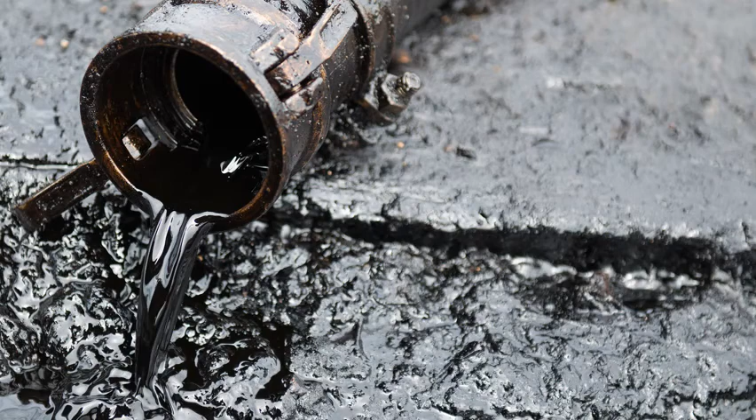This presentation is a training aid for the Spill Prevention Control and Countermeasures Plan, also known as the SPCC Plan. It was developed for Joint Base Charleston Weapons land-based facilities by the 628th Civil Engineering Squadron Environmental Element. A hard copy of the SPCC Plan can be obtained at the Civil Engineering Squadron Environmental Element in Building 721 at Joint Base Charleston Weapons. Instructions to obtain an electronic copy will be provided later in this presentation.

Your point of contact for this training, as well as any questions concerning the SPCC plan or requirements, is the Storage Tank Program Manager at the Environmental Flight, Ms. Mattia Wright. Her phone number is 843-963-4518, or you can email her at mattia.wright@us.af.mil.

The topics to be discussed during this presentation include: what is in the SPCC plan? Also discussed will be periodic inspections of oil storage tanks, as well as responding to spills.

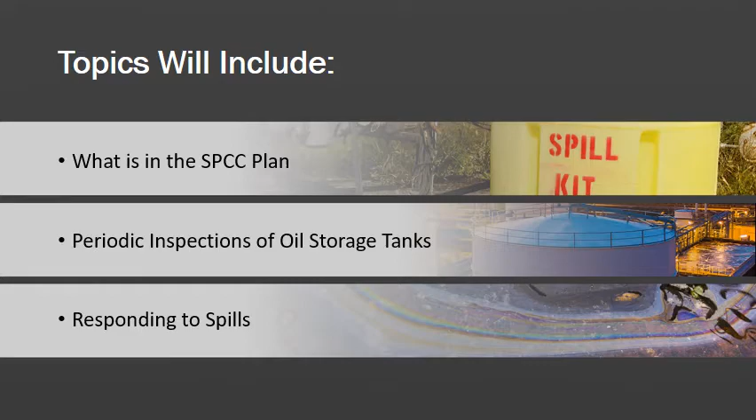So why should we worry about oil spills? Well, clearly in the past, we are familiar with the Exxon Valdez oil spill, or the oil spill in the Gulf of Mexico, and obviously these events had huge detrimental effects on the environment. But these products are used every day in our everyday life by everybody.

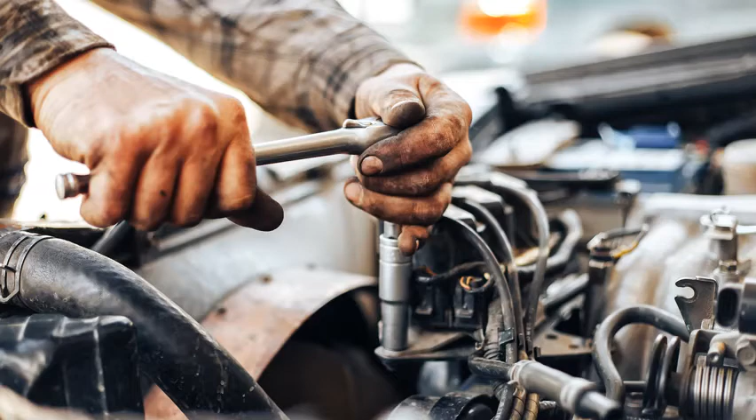It is the environmental engineer's job to find the controls and mechanisms to prevent the release of these chemicals while not interfering with their availability for everyday use, including the production of food and their uses in the actual food we eat. It is inherently obvious that we want to keep chemical hazards, along with their wastes, separated from the areas where we live. Even the chemicals used to produce the food that we eat need to be kept separate from the food itself.

When spills of chemicals or oil occur, there is a possibility of people being exposed to these materials by various methods. If any of these chemicals evaporate, for instance, they could become part of the air or smog and inhaled. It is also possible that the contaminants could work their way into drinking water sources, and people can be exposed by drinking polluted water. Also, if some surface waters are contaminated, and that water is used for irrigation, there could be direct contact and exposure to food, and eventually exposure to people through eating that contaminated food.

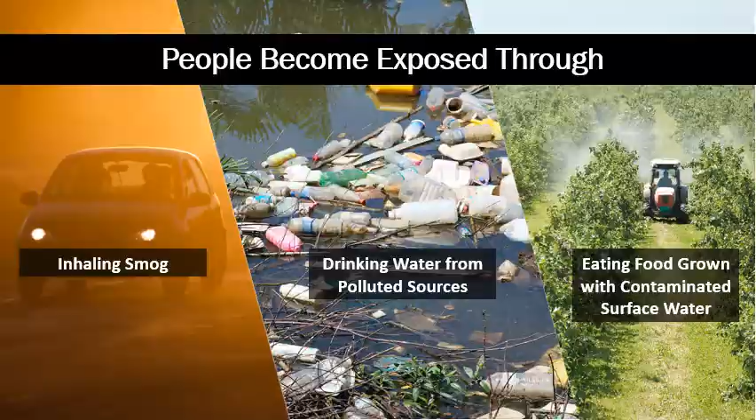Let's discuss from where the authority of the SPCC plan was originally derived. In 1972, Congress passed the Clean Water Act. Once passed, the Environmental Protection Agency, the EPA, was required to develop regulations to assist industries in complying with the new act. Some of the regulations developed required industries in certain facilities to develop plans to prevent the occurrence of spills and other hazards, namely SPCC plans. The Air Force, in turn, has developed instructions requiring installations to have individual SPCC plans that are at least consistent from installation to installation.

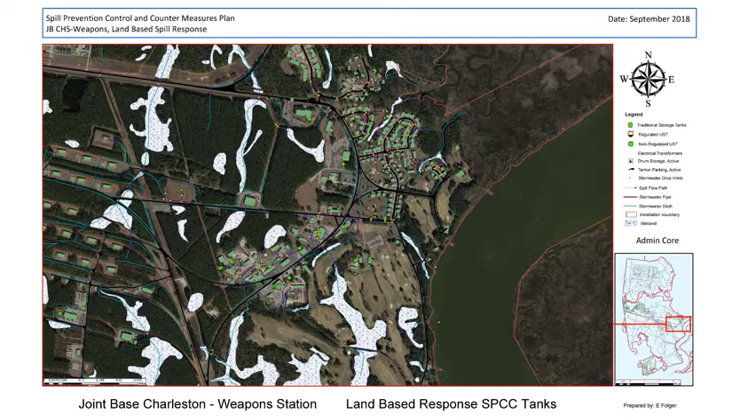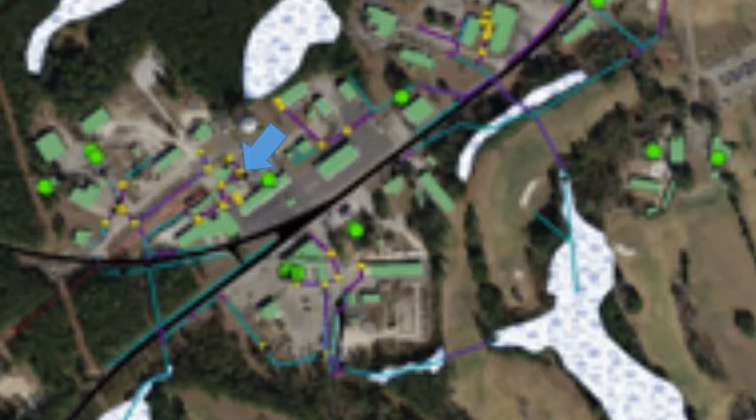Also included is a spill flow path from a given POL storage facility. This arrow coming from this particular storage tank behind Building 2 will show where a spill will flow towards which particular stormwater ditch or pipe, therefore predicting where the flow is going to go, which is the most vital information to glean from these maps.

Make sure a tank is not leaking when you fill it up. Duh! Someone has a painful grasp of the obvious. But this is why SPCC plans are written and standard operating procedures are developed.

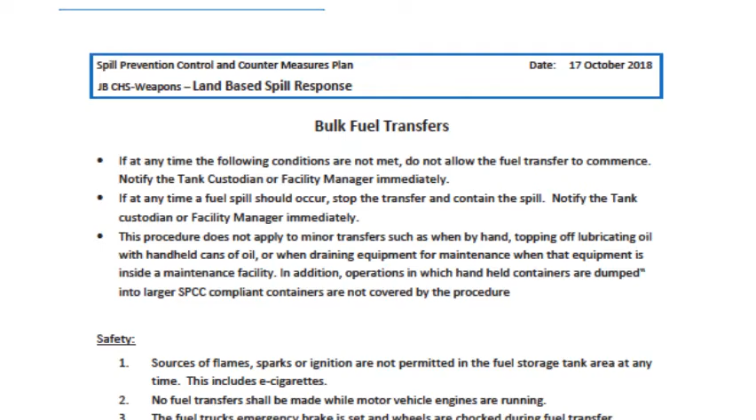In Appendix 6 of the SPCC plan, there is a checklist to be used when refueling tanks. At the top of the form, there are some conditions and safety items you should observe when refueling a tank. The middle of the form provides several steps in preventing spillage while refueling a tank.

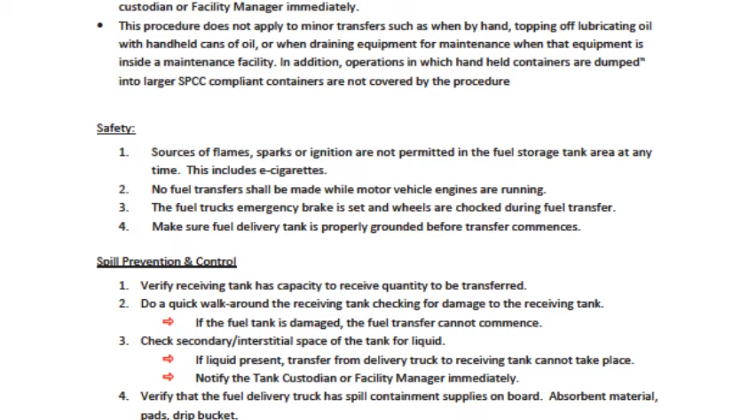For example, you should verify that the receiving tank has the capacity to receive the quantity you are trying to transfer. By checking gauges before transfer and during the transfer, you can ensure that spillage will not occur. As you approach the maximum quantity of the transfer, you should back off on the pumping speed to ensure no spillage occurs. You should do a quick walk around the tank and check for damage of any kind.

Be sure to check the berm and any other interstitial space for fuel. If there is already fuel in either of these areas, there is obviously an issue with the tank, and the refueling should not occur. Be sure that the truck has containment supplies on board, like absorbent materials or a drip bucket, etc., or that they are available at the facility itself. Be sure everyone involved in the transfer knows where the emergency cutoff switches are.

You should visually verify that all hose connections are not damaged and that the hoses are in good shape. You should remain with the fuel delivery truck for the entire transfer and hose breakdown. It is during the hose breakdown that most commonly spills will occur. You should verify the amount transferred from the receiving tank and make sure to lock all fill caps in place on both ends of the transfer.

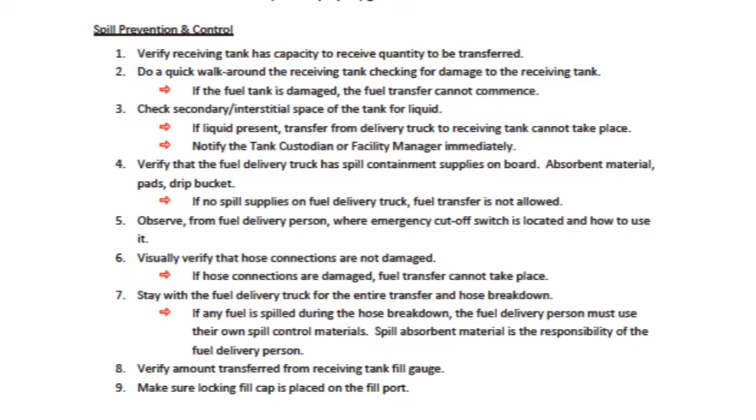Appendix 6 also provides a vehicle refueling procedure. This form provides both safety and spill prevention and control measures which should be followed during any vehicle refueling procedure. Sources of flames, sparks, or ignition are not permitted in the fuel storage tank area at any time. It should be noted that this also includes e-cigarettes.

You should be attentive during the refueling process. Do not sit in the vehicle waiting for the refueling to finish. And do not be distracted by a cell phone or any other electronic device. You should touch the vehicle prior to inserting the fill nozzle and prior to removing the fill nozzle. This lowers the risk of a fire starting from a static electricity discharge. No fuel transfers shall be made while motor vehicle engines are running.

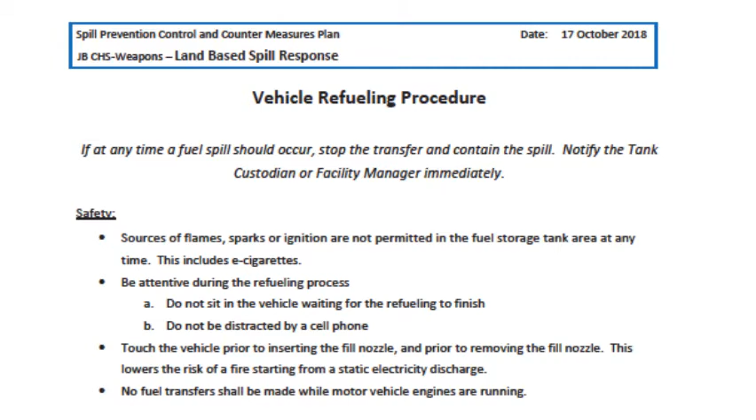To help prevent spills, you should follow normal operating procedures for starting up the pump and opening valves on the tank. Keep the nozzle pointed upward until placing it into the vehicle's tank fill tube. When you are finished refueling, replace the nozzle into its cradle, shut off the system, lock up, and complete any documentation you need to.

Remember, you should never try to top off the gas tank by continuing to squeeze the nozzle after it automatically clicks off the first time. This behavior is the leading cause of spillage from overfilling vehicle gas tanks. You should notify the facility manager if any fuel has spilled during the process. A couple of drops may be reasonably acceptable, and sometimes it's impossible to avoid. However, anything more than a few drops must be reported to the facility manager.

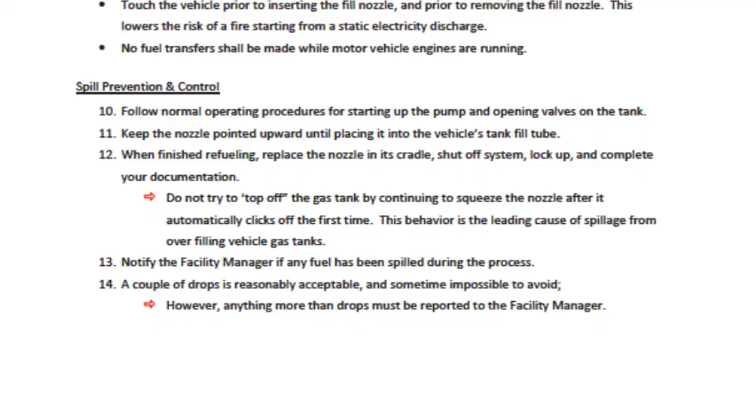Static electricity is a charge that is at rest or not moving. However, if a conductive path is provided for the static electricity, a static discharge or spark can occur. For example, a person walking across a carpeted floor reaches for the doorknob, the conductive path, and zap! They receive a static shock. This happens because static electricity is generated when the person walked across the carpet.

The same scenario can also occur when you are pumping gas, whereby the spark could ignite gasoline vapors and may cause a fire or an explosion at the pump. Due to the importance when you are refueling vehicles at Joint Base Charleston Weapons or your own personal vehicles, we want to reinforce these important safety tips outlined below.

Always turn your vehicle engine off when refueling. Do not re-enter the vehicle while refueling because this can recharge your body with static electricity. If you must re-enter the vehicle, discharge the static electricity buildup by touching the outside metal portion of the vehicle away from the fuel tank.

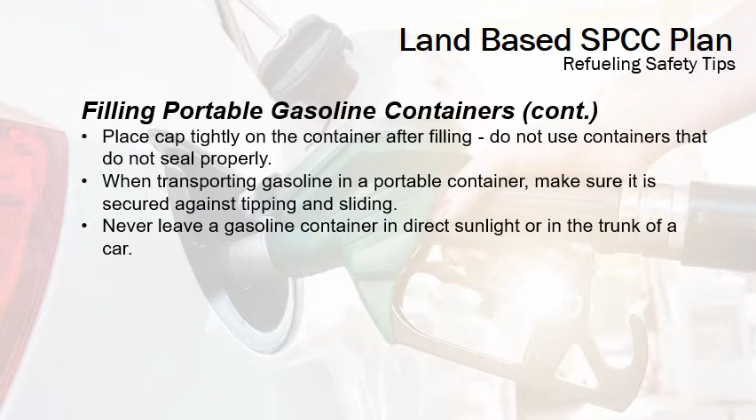When transporting gasoline in a portable container, make sure it is secured against tipping and sliding. Never leave a gasoline container in direct sunlight or in the trunk of a car. Should a fire occur during refueling, you should leave the nozzle in the vehicle and back away from the vehicle. Use the emergency shutoff button to shut off the pump and notify the station attendant.

Now let's discuss monthly tank inspections. The AFI requires monthly tank inspections. Primarily, these inspections are performed by the owner or operator of the tank. That means if you have a tank at your facility, you are responsible for its monthly inspection. Tanks attached to generators are primarily inspected by PowerPro. There are also annual tank inspection requirements, but those more in-depth inspections are performed by the CE environmental element.

In Appendix 8 of the SPCC plan, you will find an example of a monthly tank inspection checklist, as seen here. This form is for a specific tank found in the STARS database. You can print out the checklist for the particular tank you are inspecting, go into the field to perform your inspections, answer the applicable questions on the checklist, and upon return to the office, you can upload it to the electronic version of the STARS database. We will discuss that option later in this presentation.

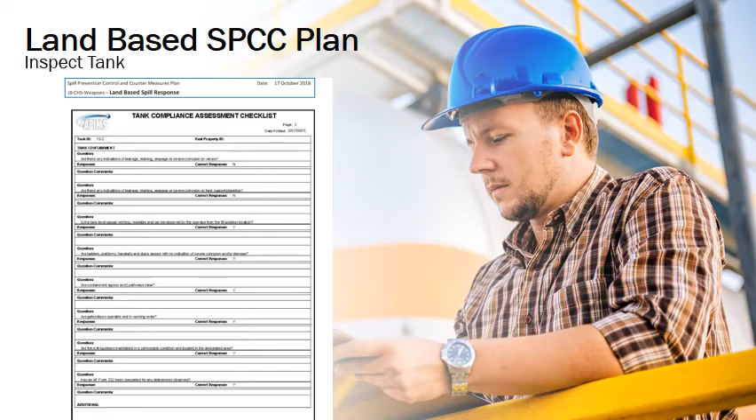Your first concern when you go out to inspect the tank is the inspection of the tank itself. There are various kinds of tanks at Joint Base Charleston Weapons, which we will discuss later. For instance, single-walled tanks versus double-walled tanks. For this discussion, however, we are talking about what you would naturally perceive as the tank, which would be both tanks of a double-walled tank or obviously a single-walled tank. You should carefully inspect the tank and its support structures and answer the questions that are applicable on the checklist.

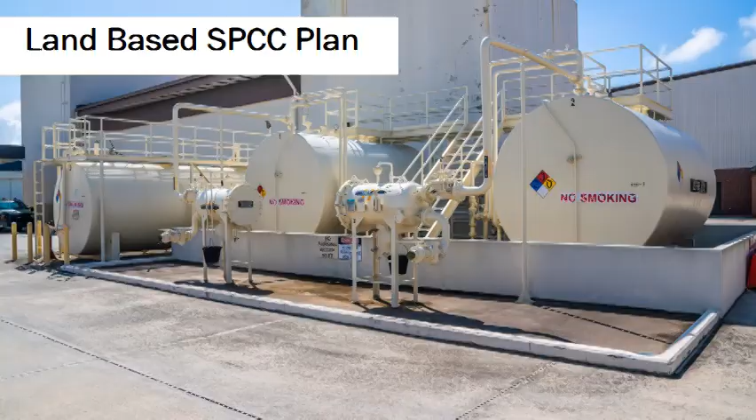This picture shows examples of a double-walled tank as well as single-walled tanks. The tank on the far left is a double-walled tank. There is one tank inside the actual outside tank that you see. This outside tank performs as a form of secondary containment. The two tanks on the right are single-wall tanks, and they require a concrete berm to act as secondary containment should there be a leak.

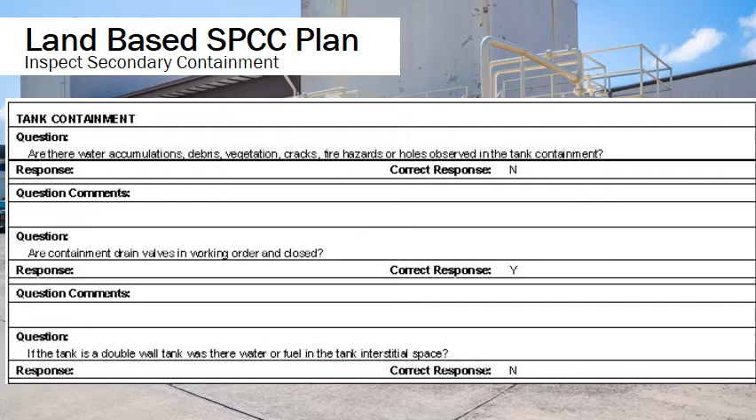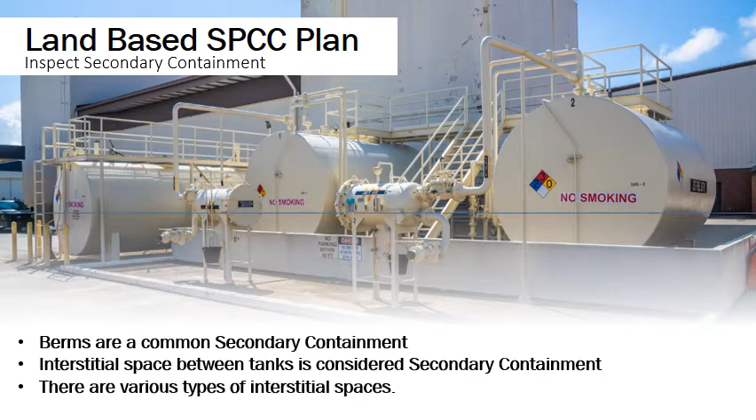Other questions on the checklist deal with secondary containment. These questions primarily deal with berms around single-walled tanks. We will further discuss later interstitial spaces, which are found in double-walled tanks. Berms are a common secondary containment option. The interstitial space of a double-walled tank is also considered secondary containment. There are varying types of interstitial spaces and different types of tanks, which we will discuss now.

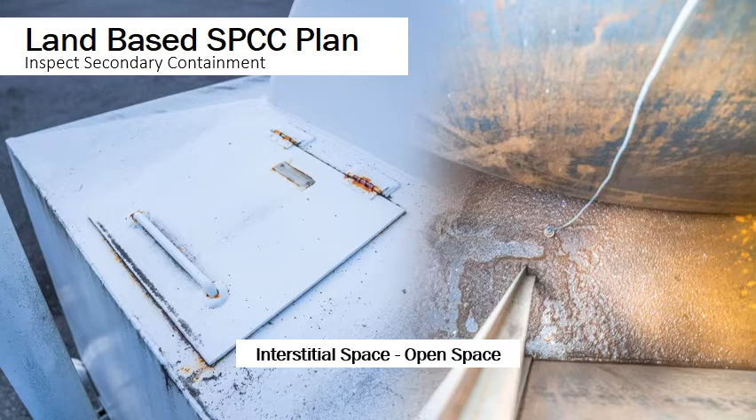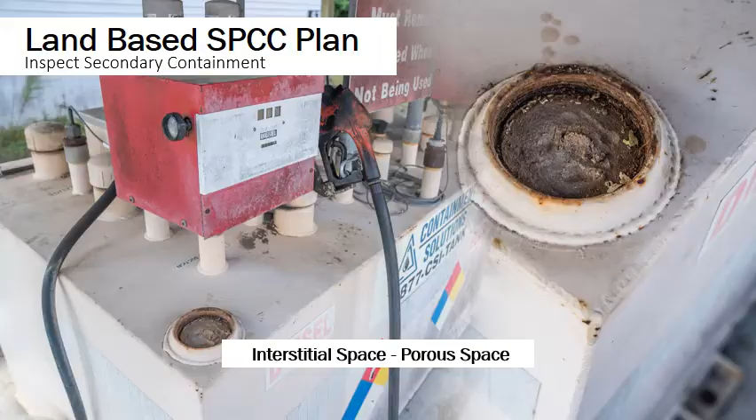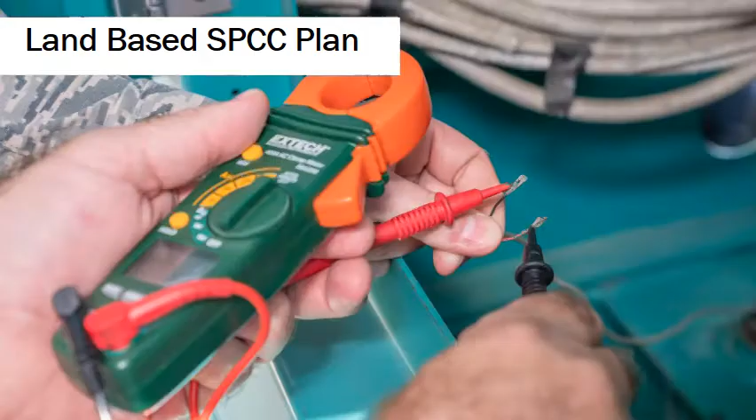Some interstitial spaces are sealed, as are many double-walled tanks, and use sensors to detect any leaks, as is also the case for porous space interstitial spaces mentioned earlier. It is important to note that the sensors used need to be routinely checked to ensure that they are in proper operating condition. This is an example of a semi-double-walled interstitial space.

The inspection checklist for the tank you are inspecting will contain questions concerning piping. The tank that you are inspecting may or may not have piping coming out of the tank. Certainly not the large piping as is pictured in this example here. Often there are small pipes or tubing coming out of the tank going to the piece of equipment the tank services. Also, there may be a hose coming from a pump to fuel a vehicle, but this is actually not part of the tank and will be discussed in the next section. You should answer all applicable questions concerning piping on your checklist.

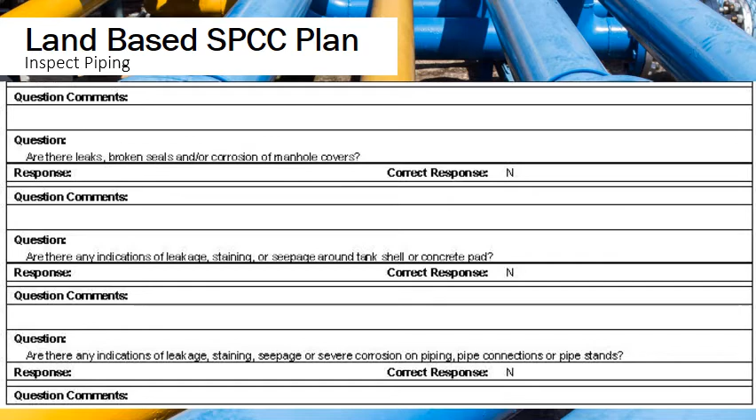There may also be questions on your checklist concerning pumps or other equipment. The tank you are inspecting may or may not have pumps attached to it, or they might be internal to the tank itself. You should follow the questions on the checklist and add any additional notations that are necessary for hosing or other pieces of equipment that may be part of the tank you are inspecting. Answer all the necessary questions on the checklist.

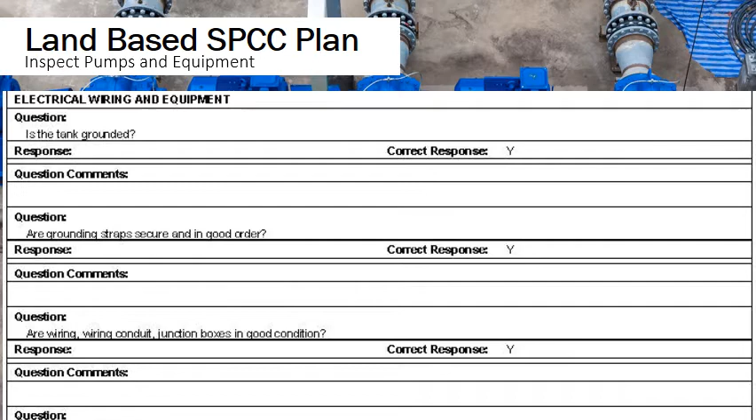Lastly, you will find questions on your checklist concerning the general conditions around the tank. So take a good look around the area of the tank and be sure to look for a spill kit. Make sure to open it and be sure that there are an adequate amount of supplies inside and that they are proper supplies for the material that is inside the tank you are inspecting. You should inspect all other ancillary equipment like fire extinguishers, as well as any gates or doors that are in the access ways to the tank itself.

There is also an electronic version of this checklist that is available online through the internet. If you are interested in using the electronic version of this checklist, please contact the Tank Program Manager at the Environmental Element, Mr. Earl Folger. He will need to grant you access and provide the necessary training for you to properly input information into the database.

The Storage Tank Accounting and Reporting, or STAR module of the APIMS database, is required by Air Force Instructions 32-7044 for all storage tanks. Access to this database requires a CAC-enabled computer and proper permissions be granted to each individual user.

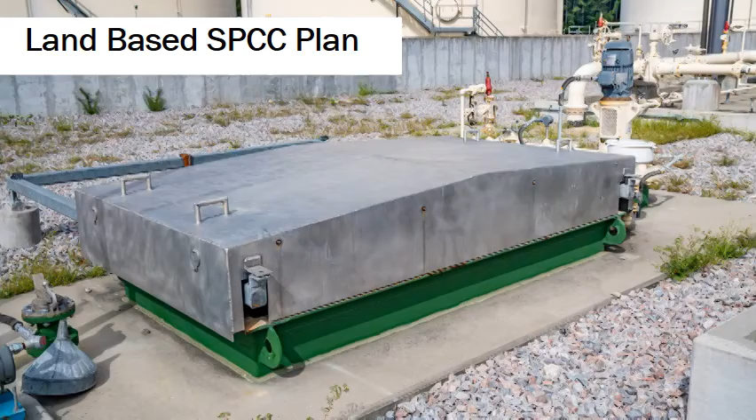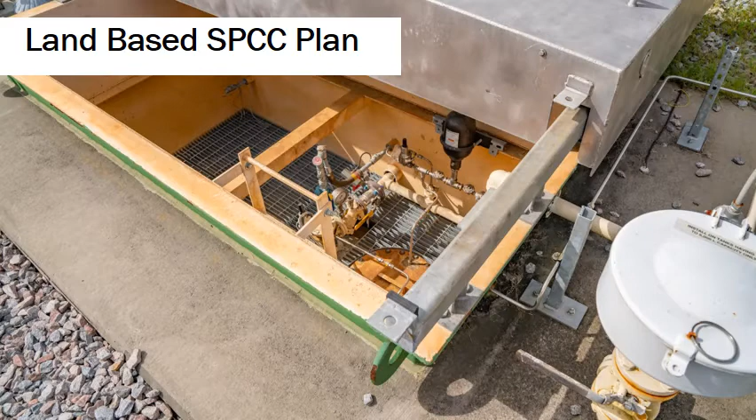The following slides will be a discussion about various types of tanks and berms, providing different examples at Joint Base Charleston. The first of which is a vault tank, which is seen here in the closed position. In many cases, piping for fuel transfers are actually left fully charged or full of fuel when not in use. So when the time comes for maintenance on the line, then often the fuel is pumped or drained to this vault tank so it can be recovered.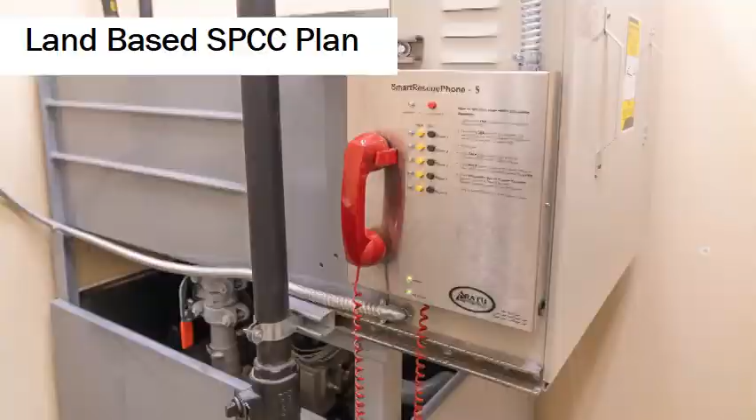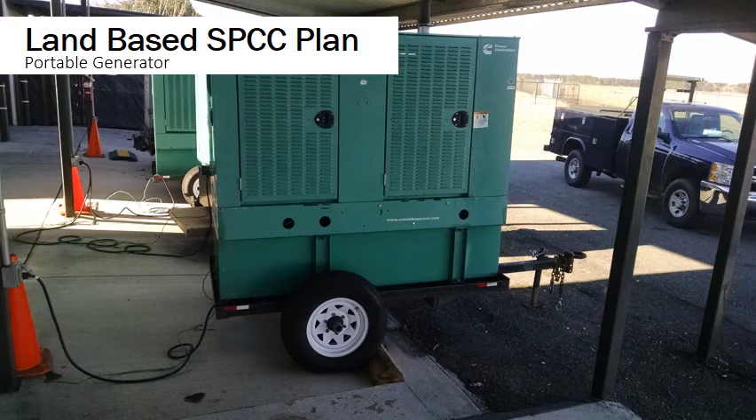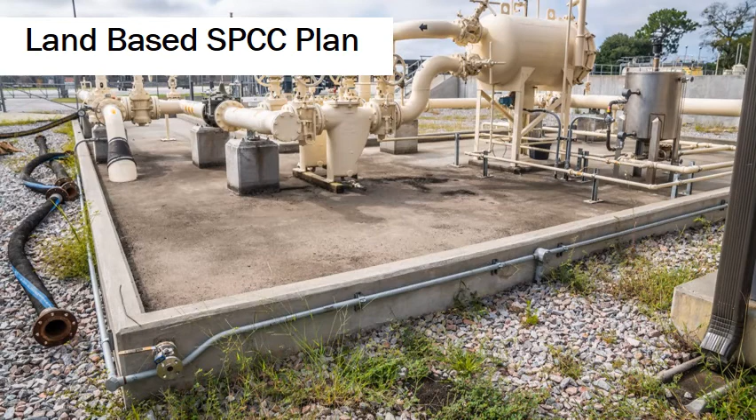This is an example of a portable generator with a belly tank. Whenever this equipment is not in use, it should be stored in an area that provides secondary containment. Berms come in various shapes and sizes. They are designed to hold a certain portion of the fuel in the tanks or piping that they contain. Note the valve in the lower left corner, which is currently locked. This is the valve that is used to drain the berm of rainwater using very particular procedures which will be discussed later.

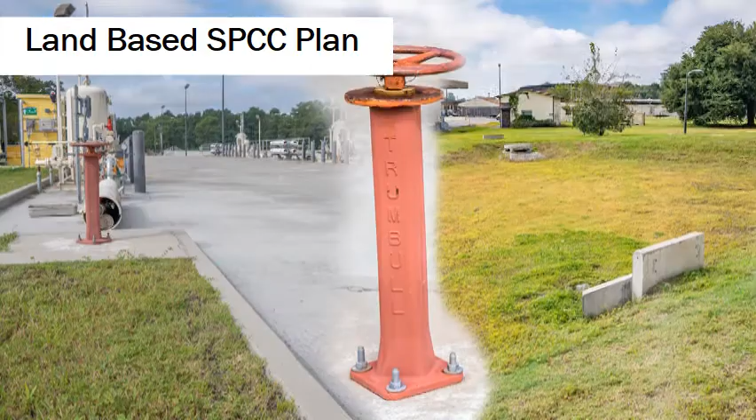We use the berm in this slide as an example of how a large area can be supported by a particular berm. The whole area on the left is the berm itself. There is what you would think was a storm drain in the middle. The valve highlighted in the middle of this slide, which can originally be seen towards the left, operates the valve that would release the rainwater from the berm after it fills up. On the right, you see the area in this particular situation where that storm water would drain to. Of course, this happens only if there is no fuel present, following particular procedures which will be discussed later.

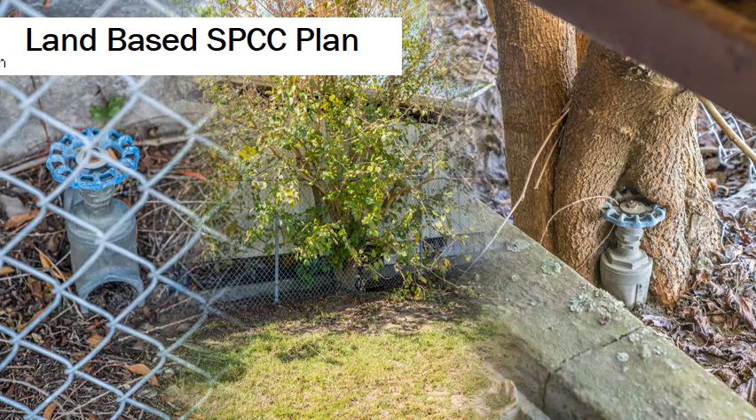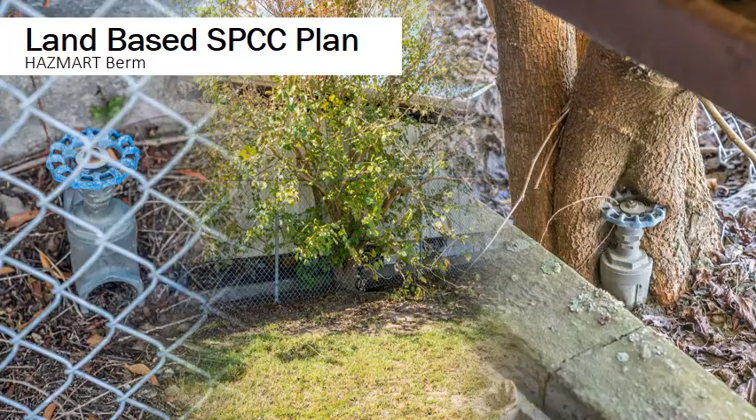All berms should have non-automatic open and close valves. These valves are to remain closed and locked until such time as rainwater needs to be drained. A trained person knowledgeable in detecting sheens has to visually inspect and determine if a berm can be drained to the ground.

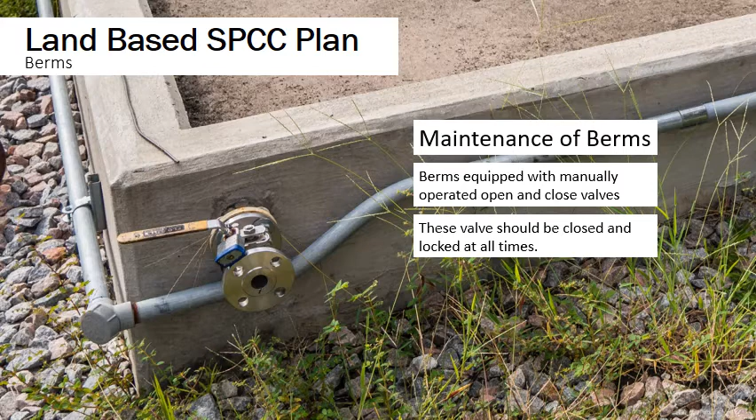The following procedures should be used in the process of draining a berm. First, inspect the rainwater for a visible sheen. For a minimal sheen, you can use absorbent pads to remove any product. When no sheen is present, unlock and open the valve to drain the berm. After the berm is empty, close the valve and lock it. Lastly, be sure to complete the secondary containment drainage log.

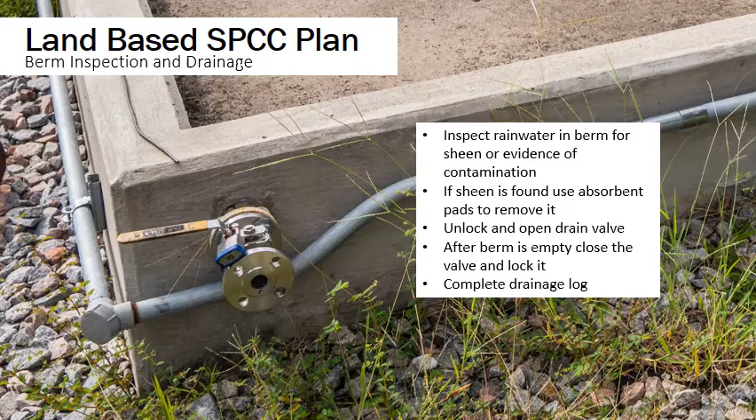It should be noted that if the sheen is excessive or there is actually a layer of product in the berm, you should contact the environmental element for assistance in investigating the possible source. A secondary containment drainage log must be kept for all berms. This drainage log can be found in Appendix 8 of the SPCC plan.

Portable tanks, when not in use, should be stored in areas with secondary containment. It should be noted, however, that if the portable tank is empty, it does not need to be stored in a containment area. Some portable tanks actually are double-walled and have an interstitial space and therefore a self-contained secondary containment. Tanks like this do not have to be stored in containment berms. All portable tanks should be operated in accordance with their individual technical manual or manufacturer's specifications. Specific SOPs should be followed for the filling and transfers of fuel or oil to and from any portable tank.

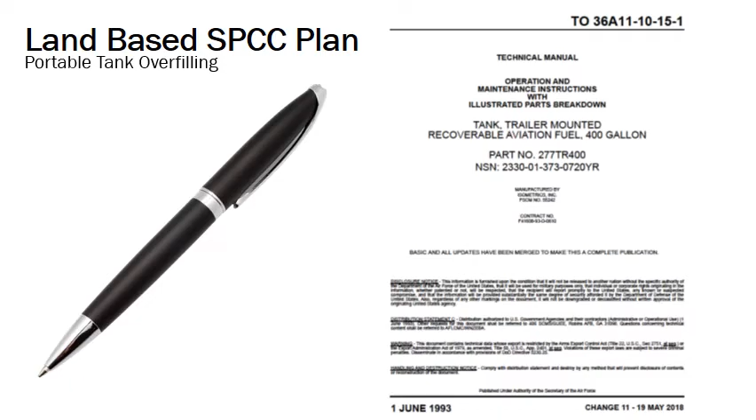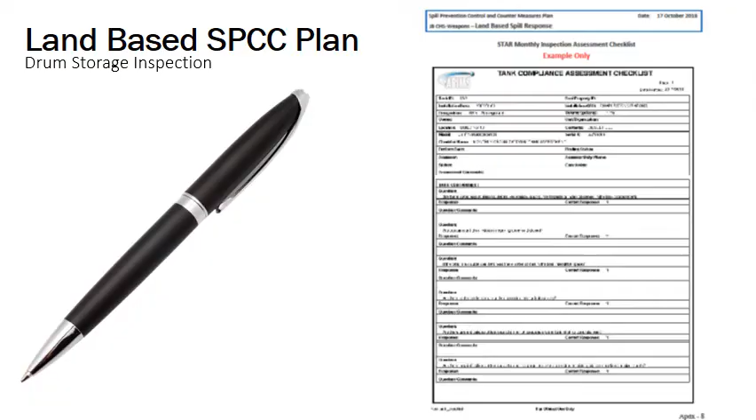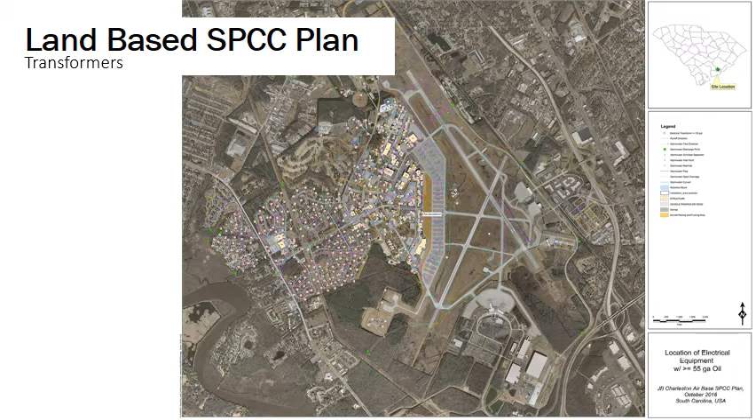A map is provided in the SPCC plan showing where all the electrical transformers containing in excess of 55 gallons are located. There are hundreds throughout every area of the weapons station.

Weapons station electrical shop personnel are charged with doing the periodic inspections on all transformers. The checklist shown here is found in Appendix 8 of the SPCC plan and should be used for that inspection unless another form is approved by the environmental element.

Anyone on base, however, who observes that there is an issue, perhaps a leak or a spill from a transformer, should report it immediately to the environmental element personnel and the electrical shop.

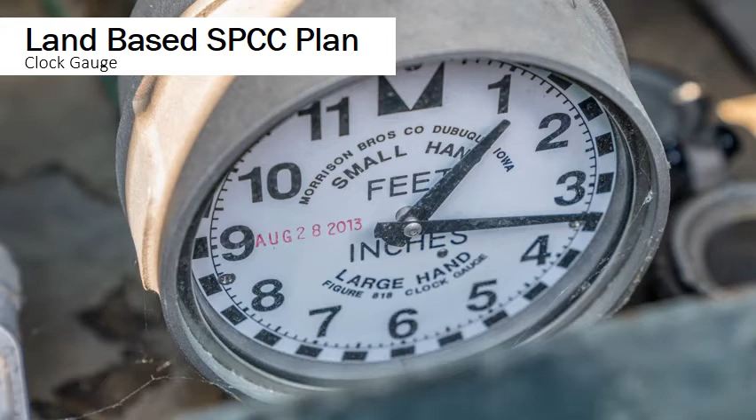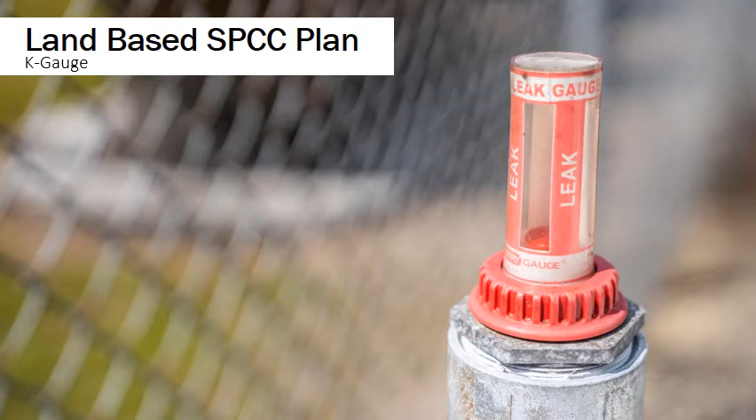On a double-walled tank, the space between the two tanks is called the interstice, or the interstitial space, which is synonymous with secondary containment, of course. In this picture, you will see a K gauge, which is actually installed in the interstitial space of a tank to determine whether or not there is a liquid in that interstitial space.

If the gauge indicates that there is liquid in the interstitial space, then there's an excellent chance that you have a leak in your inner tank. The particular gauge in this photo is indicating that there is not presently a leak occurring in the interstitial space. If there were a leak in the interstitial space, the small red disc that you see at the bottom of the gauge would begin to float up in the lens that you would see.

One word of caution. Sometimes gauges of this type will become inoperable due to corrosion or buildup of materials around the disc inside the gauge itself. The only way to check on this is to unscrew the gauge, which you should be able to do by hand, and make sure that the disc indeed is free to move and is not corroded. There have been instances where the gauge indicated that there was not material in the interstitial space, but because of this corrosion, the disc did not rise up as expected and the leak went undetected.

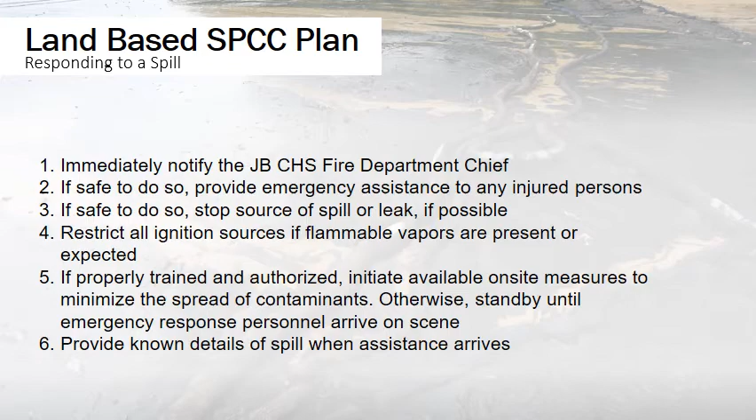As you are cleaning up the spill, remember that all materials used will need to be containerized in a drum or other proper container and prepared for proper disposal. This material may include the absorbent material spread to soak up the liquid, for instance, the kitty litter or clay material, any absorbent pads or socks that were used, and any personal protective equipment that was worn during the cleanup.

One should keep in mind that very often this waste is disposed of at a cost per pound. You certainly should use enough material to get the job done, but keep in mind any excessive material contaminated will increase the cost of disposal. However, it is more important to get the job done.

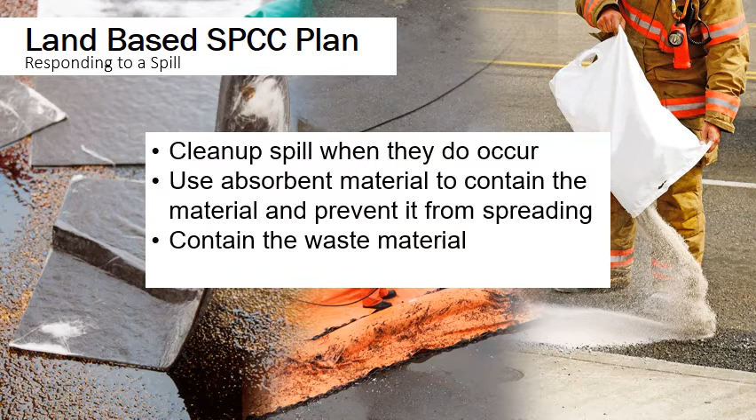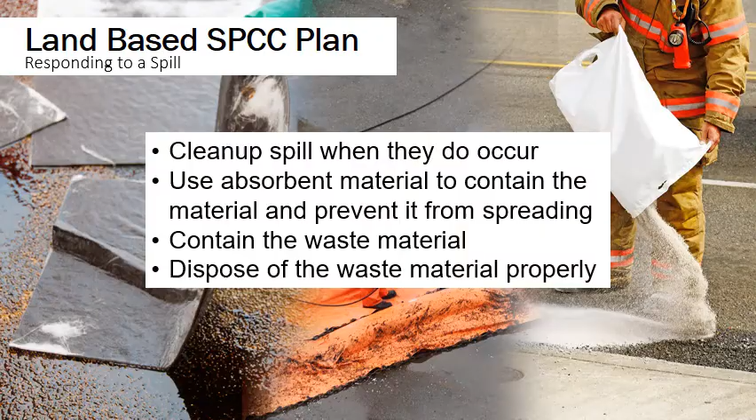Arrangements will need to be made to have any contaminated materials properly disposed of. Depending on what was spilled and the methods and quantities of materials used during the cleanup, disposal methods can vary. Now let's discuss how to dispose of materials properly. There are varying methods of disposal depending on the type of materials themselves.

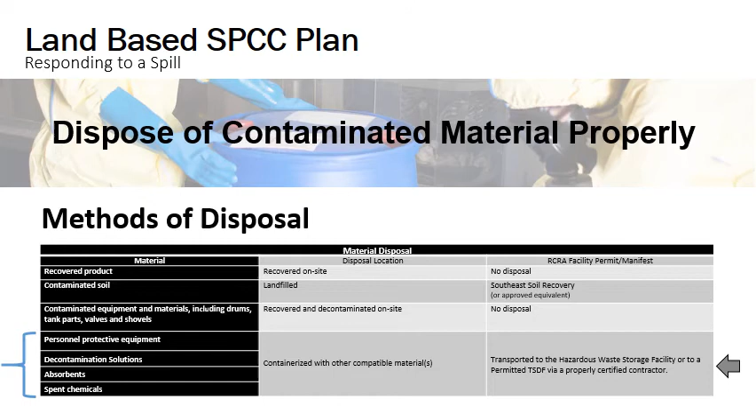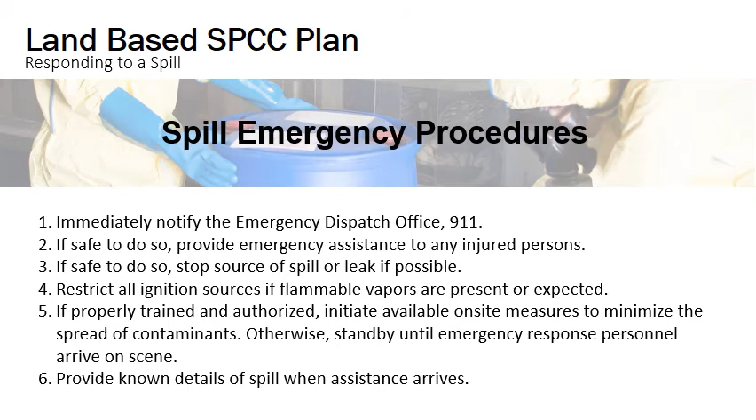But what if there's an injury at the scene? What if you can't stop the leak or restrict any ignition sources? Or you are not trained to initiate the cleanup? Then it is your job to ask for and get help and provide any known details when assistance arrives. Your first call for help should be to the fire department. Call 911. This is the simplest number to use to get all relevant parties to an emergency.

The 7-digit phone numbers provided below are to specific parties that can be reached if a non-emergency exists, but further help is needed to resolve a problem. Again, call the fire department first at 911. Do not be afraid to ask for help, even if you may have mistakenly caused the spill. People don't get in trouble for asking for help. They get in trouble trying to cover things up when they should have asked for help. Remember, always ask for help.

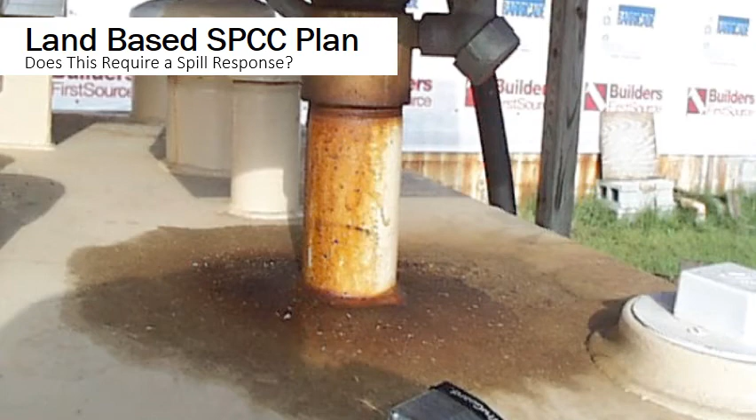Does this require a spill response? You can see some staining on the side of the tank, where apparently a leak or spill has taken place. Looking closer at the top of the tank, it does not appear there is an active leak. The stain is not getting bigger. Should this be cleaned up? Yes. Should someone be notified? Yes. Does this require a spill response? No. The stain is not getting any bigger, and there is not an active leak.

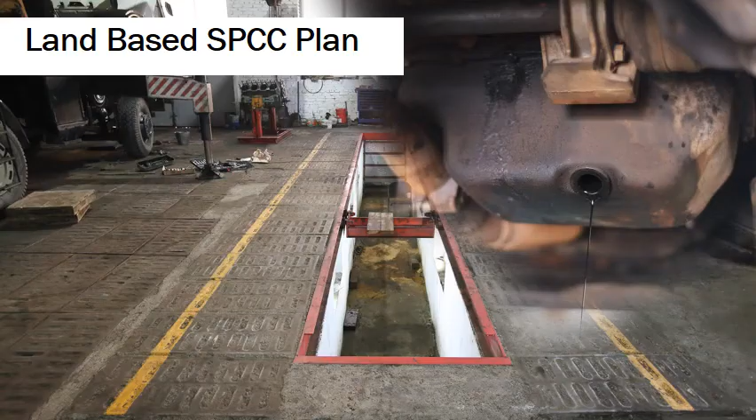Let's take a look at this situation. A spill has occurred, but it is contained completely within a building. There is no release to the environment. It would be an obvious concern to the shop personnel and especially the shop foreman, but environmentally speaking, it has not reached the outside environment and therefore does not require a formal spill response from an outside entity.

This is an example of a spill that is in progress. Does it require a spill response? Absolutely. The spill is fresh and still active, therefore it requires a spill response.

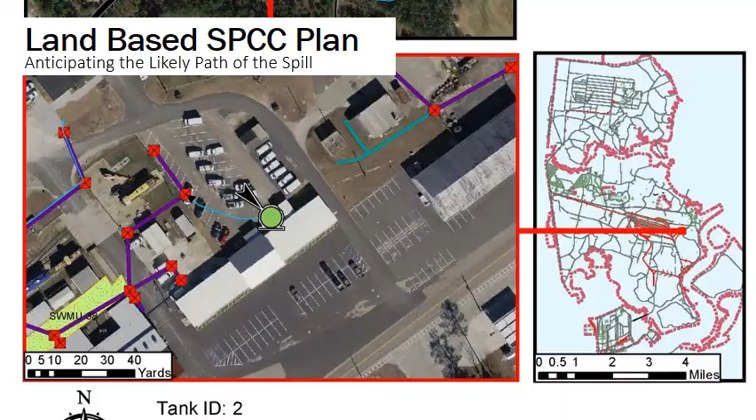Now that we have discussed what may or may not require a spill response, let's take the next step and discuss what needs to be done after the cleanup is complete and you need to report and document the spill. The SPCC plan covers the reporting of spills. Per the SPCC plan requirements, if there was a release to the ground or surface water and a complete cleanup was performed, then a report needs to be completed and documented.

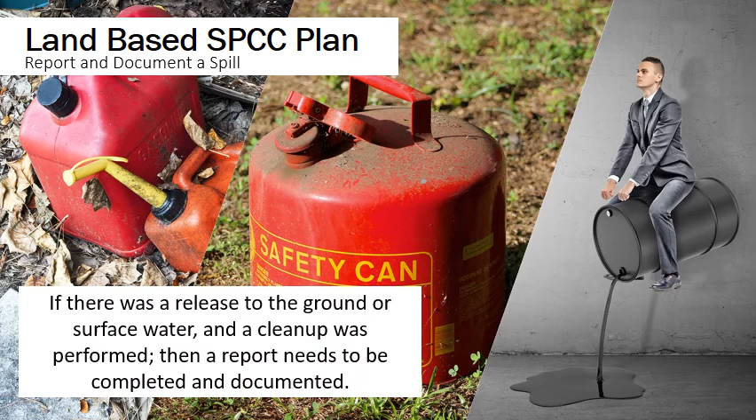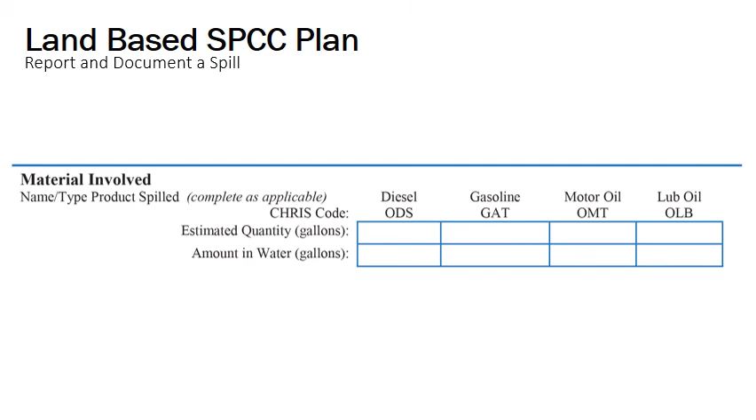In closing, it is important to realize that it is everyone's responsibility to keep their eyes open for things that look wrong and report them to the proper personnel.

Once again, your point of contact for this presentation or any questions about the SPCC plan and its requirements is the Storage Tank Program Manager at the Environmental Flight, Ms. Mattia Wright. Her phone number is 843-963-4518, or you can email her at mattia.wright@us.af.mil.